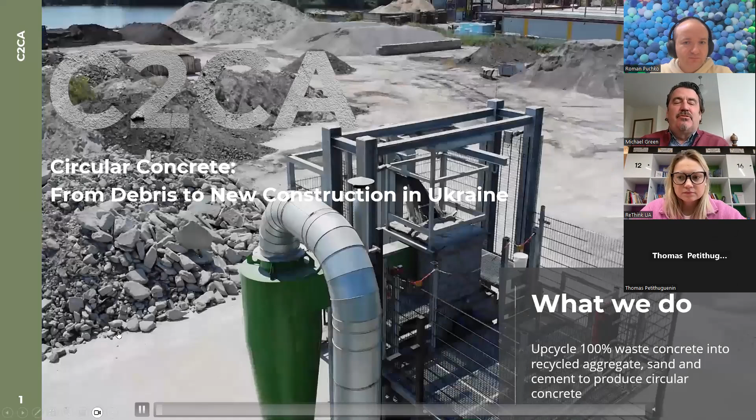Let me introduce myself, I'm Michael Green. I'm an Irish-American living in Rotterdam. In fact, I'm on the lovely Coolhaven River, just off the River Maas here in Rotterdam. And I've been working with C2CA since the beginning of the year.

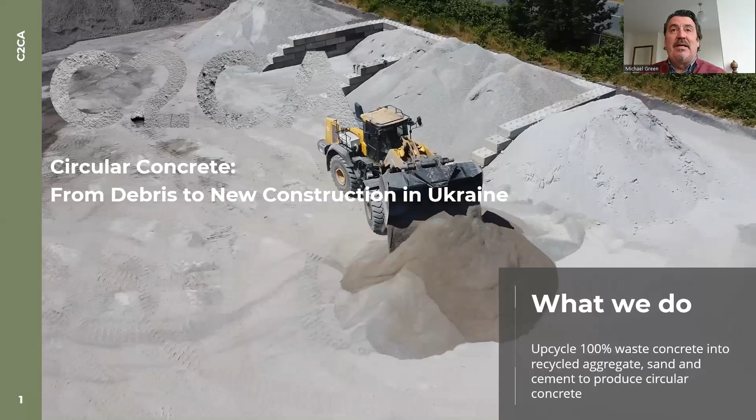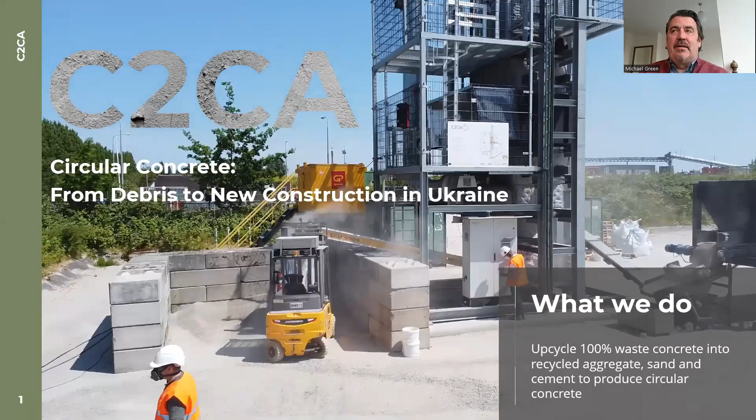Going back to what Thomas said, what you're seeing on screen is actually our demo facility in a town called Hoorn, just north of Amsterdam. The history of the company - Thomas gave you an idea of the technology a little bit, although I'll get into that.

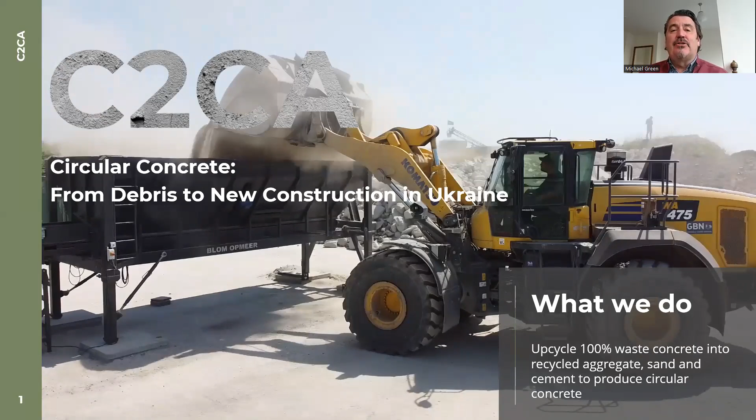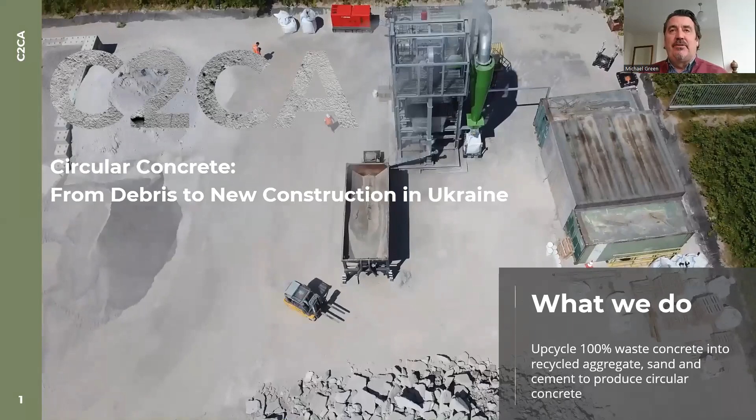C2CA is actually a startup spin-out from the Technical University of Delft. So speaking to Jorg's point, this is a Dutch technology and it's being perfected here. But as Thomas mentioned, we're eager to get into other countries, and in particular, Ukraine gives us a unique opportunity to process a lot of waste, end-of-life concrete waste, all in one place.

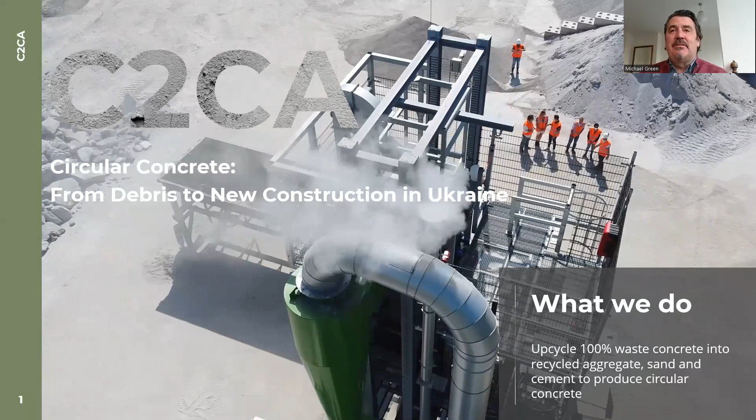But before I jump into the presentation, I just want to say a few things. Number one, Slava Ukraini. We really respect the grit and courage of Ukraine. We hope you join Europe soon.

But without further ado, just a look back to C2CA. Our mission and vision is to phase out the use of virgin materials. What that is to say is we don't want to keep quarrying stone and taking sand out of our rivers. We'd like to reduce the use of virgin materials.

In fact, the numbers don't add up. For the time being, it'll be a mixture of both, but what we'd like to do is massively decrease the use of virgin materials that impacts our environment. And we would like to make concrete a fully circular system.

That's to say that all of the old infrastructure - kind of the business model for us is the old infrastructure in Western Europe and the United States is coming to end of life. So there's a huge supply of end-of-life concrete, and we'd like to put all of that right back into concrete to rebuild that infrastructure.

Obviously in Ukraine, you have a high amount, a large amount of this waste concrete that we would be very eager to help you put back into new buildings, to rebuild Ukraine in a circular way.

Because I can tell you as a non-Dutchman in the Netherlands, it's very interesting to see, and we'll talk about this later in the presentation, how the culture of the Netherlands is to recycle everything. I might step back and say there's a joke here in the Netherlands that God made the world, but the Dutch made the Netherlands. And that is to say, they don't have any space to landfill. Over 20 years ago, government, civil society, and industry agreed that they would not landfill any end-of-life concrete. They would recycle it all.

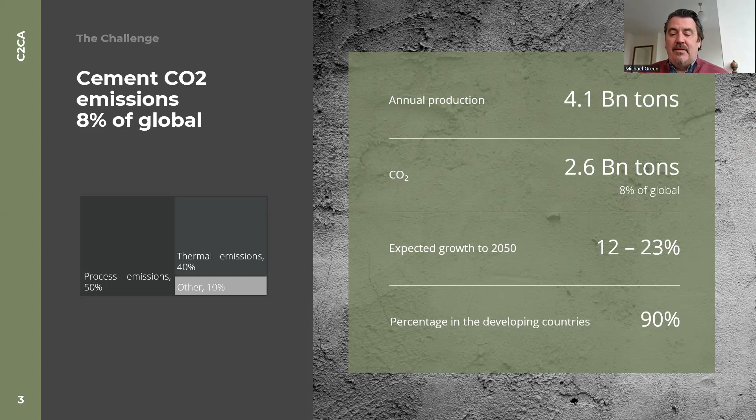So this is kind of the global view. We don't have to spend a lot of time on this. Again, Western Europe and the US, post-World War II infrastructure is coming to end of life. Ironically, China is actually already rebuilding some of their 1980s and early 1990s infrastructure. So they have a huge amount, but this is just a quick global view.

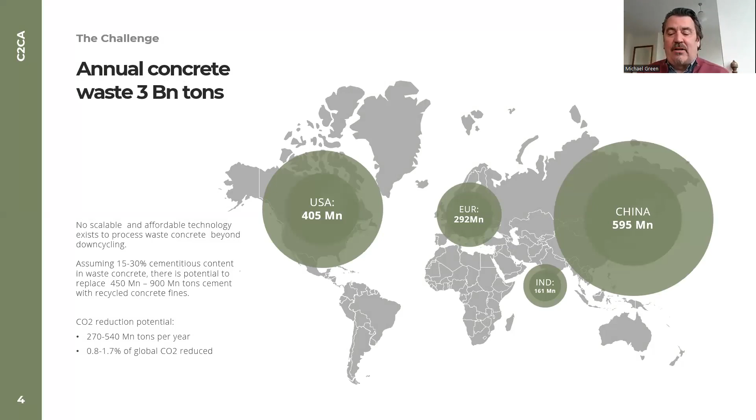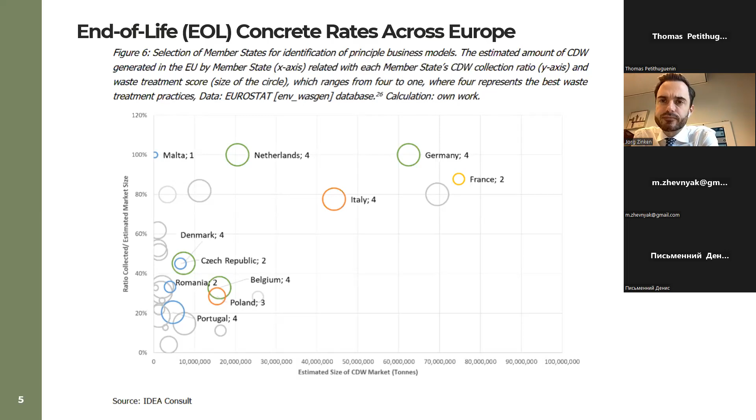So the Netherlands actually leads the world undeniably in the upcycling of concrete. I'll get into more statistics later, but here's actually the graph - you can see the whole EU here. And again, Slava Ukraini, we hope to see you on this table soon, and near the top, not the bottom.

But I put this here just for when we share the slides later - there's a little bit of interesting reading just to see who's doing what in concrete recycling across Europe. But what I would say is, again, there's recycling, but there's inside of recycling, and you'll see this on some of the next slides - there's downcycling and then there's upcycling.

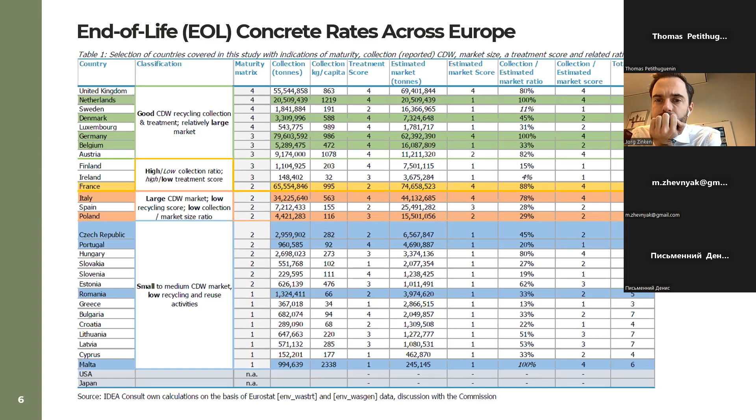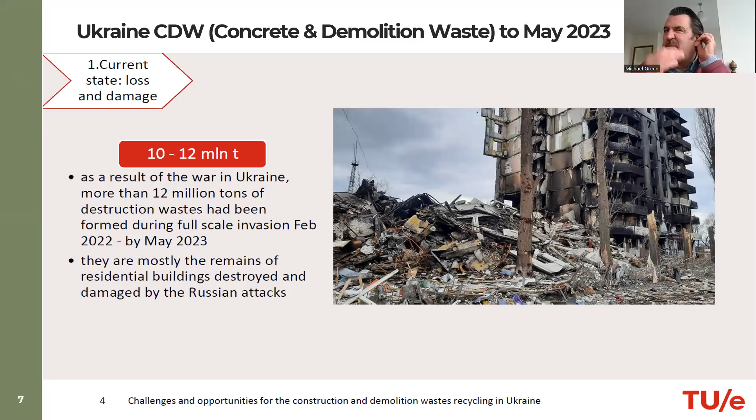You get the stones and the sand covered in the RCP, or the cement paste, and what we're endeavoring to do is separate those all out in a very clean way. As Thomas mentioned, one of the challenges of the industry is to do that in a way that meets the quality requirements of the people who want to buy that stone and sand to put back into new concrete.

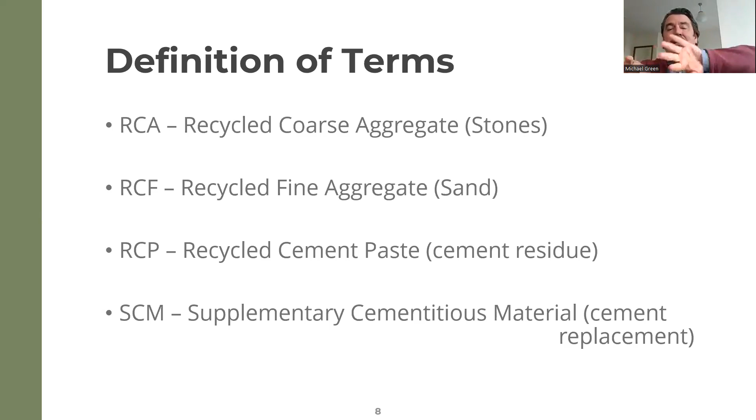So again, recycled coarse aggregate are stones, recycled fine aggregates are sand. The process is to get the RCP, or recycled cement paste, off of those two elements so that we can process that and put the stones and the sand back into concrete.

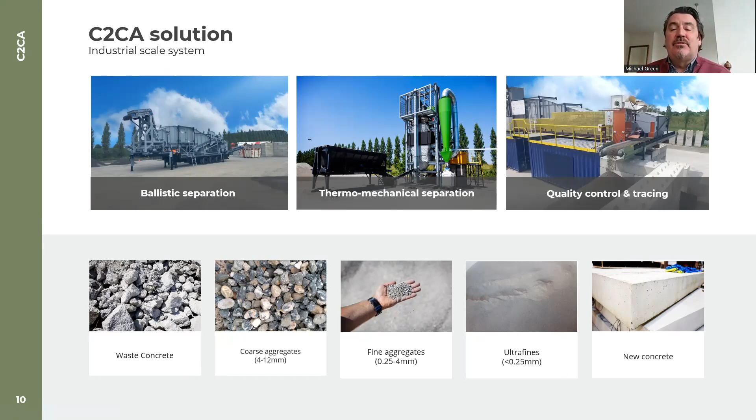I'm going to show you this again, but now also the difference with creating new cement—they use the word clinker, that's kind of the base material. For new cement, it's roughly 1 ton of CO2 that goes into the atmosphere for 1 ton of cement, roughly. The official number is 900 kilograms, but it's about 1 ton for 1 ton, roughly. For 1 ton of the SCM, or supplementary cementitious material...

...we're saying it's less than 20. We're still confirming that number, but it's very clear to us that once our process is optimized, it's an order of magnitude lower CO2 into the atmosphere to develop those SCM. So it's the upcycled cement substitute, really—that's that ultrafine element, and there's a few more steps. For anyone who really wants to do a deep dive into the technology, we'll sign an NDA and we're happy to share. We hope to get an installation sometime next year into Ukraine, but we're still working on those details.

But you can see clearly the environmental impact—the greatest environmental impact we can have is to recycle that cement paste.

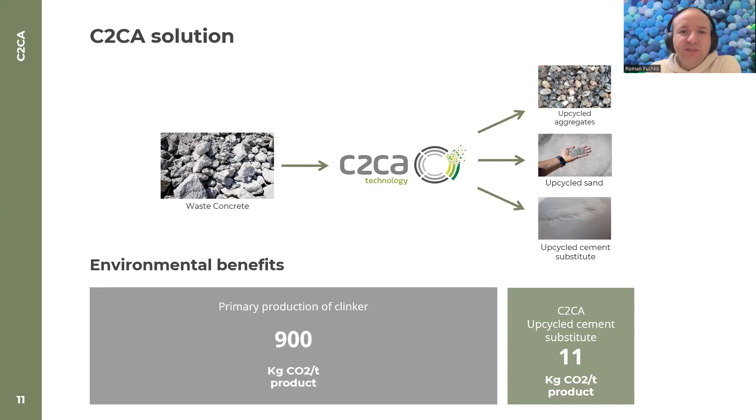Sorry for rambling. Yes Mike, thank you. I guess we could move forward a bit and then come back to Q&A again. Okay, so I've been speaking to this for the last few minutes.

You really need industry and government - government sets the standards, and industry has to accept them. So I've been holding off on saying this, but here in the Netherlands, for most applications, you can use - and I'll show you some of the applications we've tested in the real world at the end of the presentation - up to 100% recycled aggregates, meaning the stone and the sand. Now there are a couple providers of concrete saying they're fully 100% circular. I would debate that with them strongly, but it seems to me what the market is accepting right now is 30%, maybe 40% recycled aggregate use in concrete, just because the building standards - the government's saying clearly go for it, industry is saying okay, we're still learning, we're still testing.

But the good thing is there are ways to test this, and we're doing this all the time - every week we're doing new tests, and we're actually working with the government ministry that manages the canals and river infrastructure. It's a contest, an opportunity for us - we did it a couple of years ago, and you'll see a couple of the examples at the end. But they're asking us to do it again to see if we've improved our process, and whether it changes the performance of the concrete.

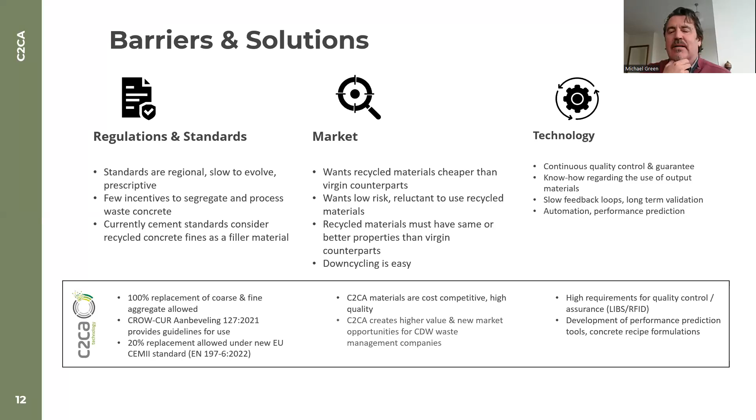So do we want to talk at all about many of the conversations we've had over the last few months with some of the university players and what's going on in Ukraine, or leave that for a later webinar? No, I think we can leave it for later, but it's just important to underline that in the Netherlands you can replace 100% of the aggregate and up to 20% of the paste. That's correct—20% of the cement mix. Yeah, cement mix, yeah.

So again, here are the Dutch facts. About 20 years ago, they just agreed: no landfilling, and we're not making our problem somebody else's problem.

I can tell you—and Roman and I talked about this yesterday when we were going over the presentation—while this started more than 20 years ago, the Dutch are increasingly challenging themselves. There's something called the Beton Accord from 2018, where industry agreed with government and civil society that they would accelerate the transition. The Beton Accord in 2018 said by 2030 we want to be more aggressive, and we want to make our concrete 100% recyclable or circular by 2030, as an industry and as a country, as a nation.

And so now, in government tenders, if you're not trying to sell the government on infrastructure projects using concrete with recycled aggregate, you get—I want to say demerits—you'll get rated lower. The recycled aggregate gets rated much higher. You can still pitch without it, because maybe we won't have enough, but companies pitching recycled aggregate will be ranked higher on tenders. And in fact, it's already happening now.

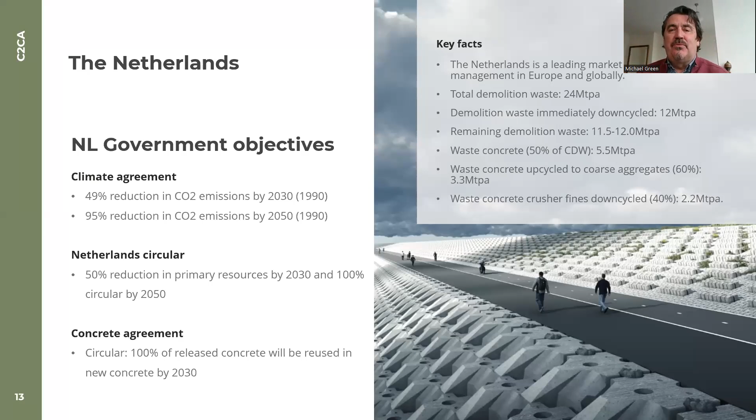Are there any other questions? I see a few more on the Q&A poking in. Yes, there are. Well, I'll stay with this one. Some of them - yeah, I don't think it's about this one, but I will leave the financial questions for the final discussion.

Please share a sample of concrete mix design with recycled components, if possible. Yeah, that I can't do, and we all know that. No? Well, that's strange. Yeah, I don't have one up my sleeve. But it's funny, that's a good question, because we've actually discussed at C2CA coming up with some of our own mixes, but the whole mix thing is a whole other category of conversation. But it's a great question.

People will probably ask questions about that. I'm not an engineer, so that's about as far as I want to go on this, but I can show you a few examples now.

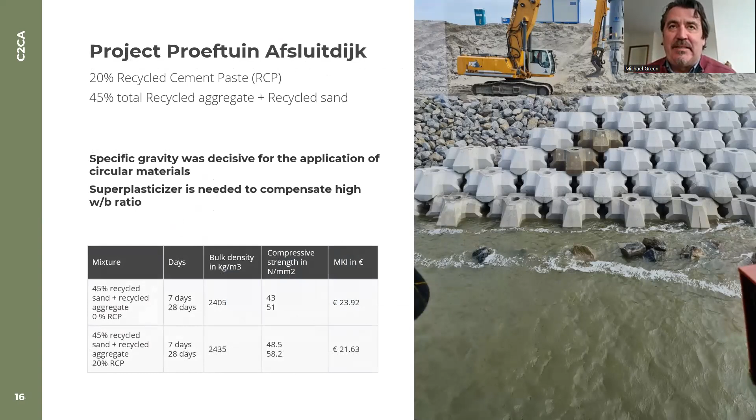In coastal defense, which is a big deal here in the Netherlands, at the Afsluitdijk, we've made these butterfly blocks.

You can see on the left—oh, somebody just raised their hand. Nataliya raised her hand, let's see if she has a question. I'll do my best to let her speak—Nataliya is the PhD student from Ukraine at TU Eindhoven who provided those slides of the Ukraine situation. Do you hear me? Yes. Perfect, hello, thank you, hello.

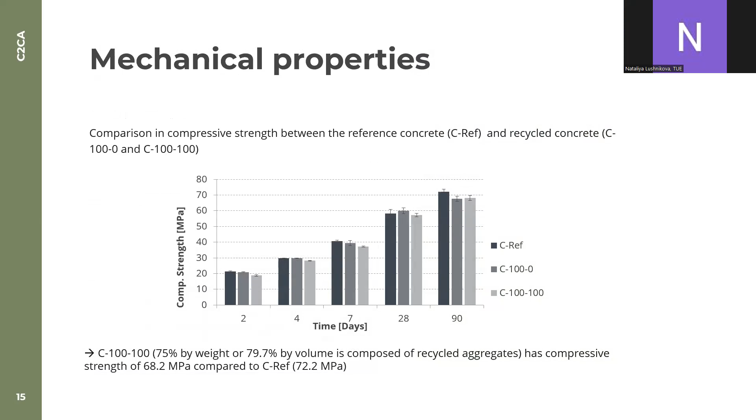I have a question regarding the previous slide: do you have test results with fines from recycled concrete, not only recycled aggregate or ultrafines, as a supplementary cementitious material? That was also my question. Good one—we don't. So you're asking if we have performance data about the SCM?

Yes, that's what she asked. Yeah, we're not there yet. We're probably 12 months away from actually having an SCM that we'd put out to the market for testing—maybe a little longer, because of putting together our flagship facility. Anyway, that's a longer conversation.

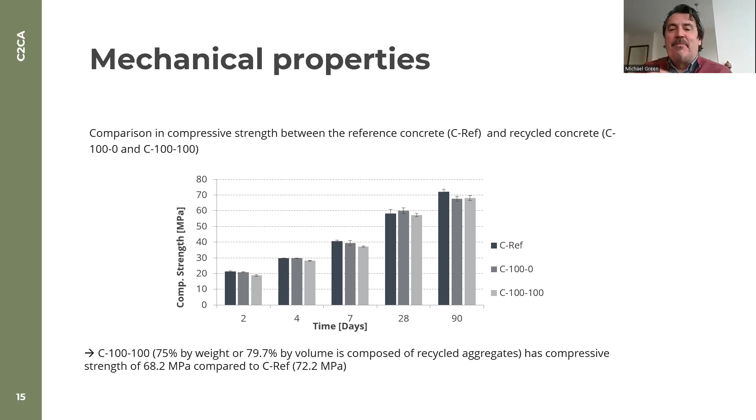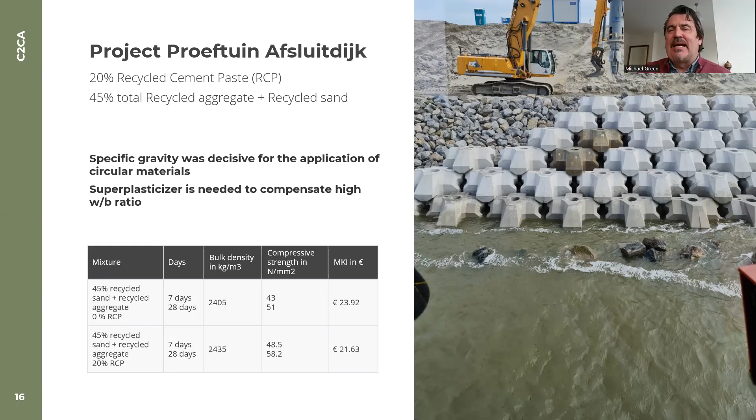These following slides speak just to the aggregates—compressive strength, bulk density, and also the MKI, which is the environmental benefit you get from these blocks. Those are low numbers, but that's also because we're using regular cement, et cetera. But there is some benefit. Really what we're trying to show the world is the use of recycled aggregates in these real world environments.

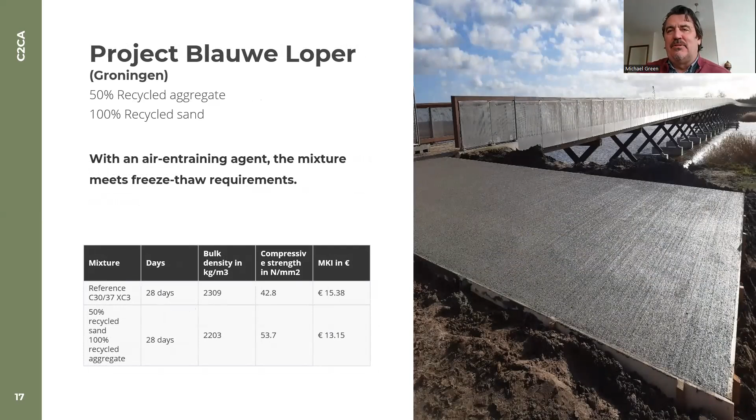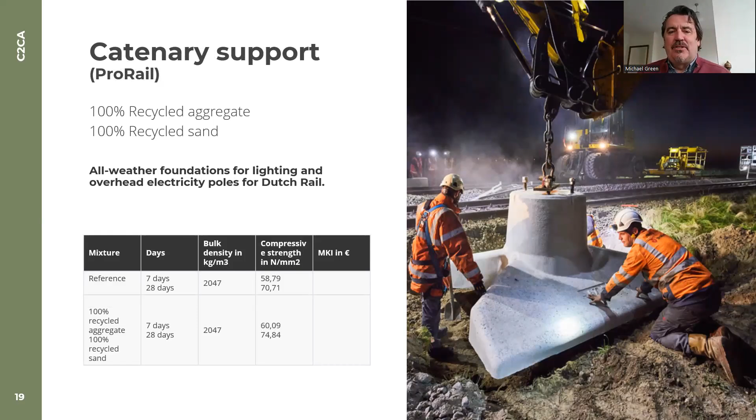Probably the most interesting from an industrial perspective is that these are also butterfly blocks, but used by the Dutch National Railway for lighting poles and electrification poles along the railway. Those are actually in use now.